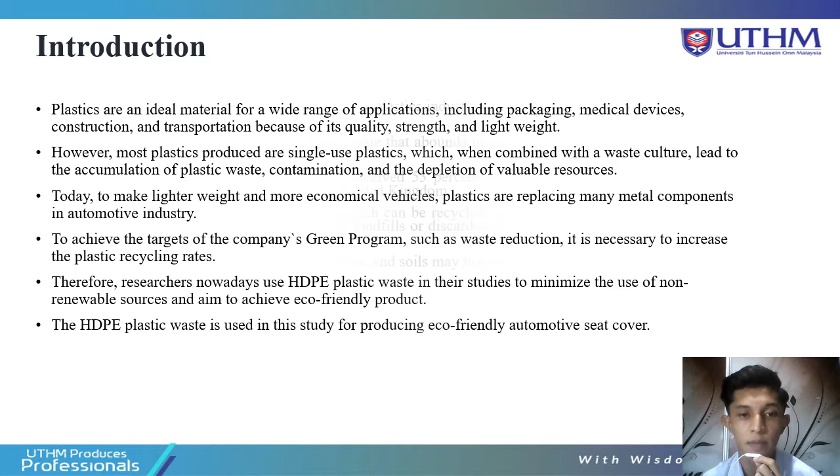Problem statement. According to the study, the main challenge for the plastics industry is determining the best way to reduce and reuse plastic waste rather than recycling it.

Plastic used as packaging is a popular plastic waste that abounds in our landfills, and Malaysia has become a global garbage dump. In the first 7 months of 2018, Malaysia received 53% of the 7.5 million tons of plastic waste imported by the United States, Japan, and United Kingdom.

Just 9% of this plastic waste is pure plastic which can be recycled, while the remaining 12% is incinerated and the remaining 79% is disposed of in landfills or discarded in the natural world, according to Ahmad, Abdullah, Chelliapan and Ahmad 2019. Animals may die because of the plastic waste, and soils may become clogged.

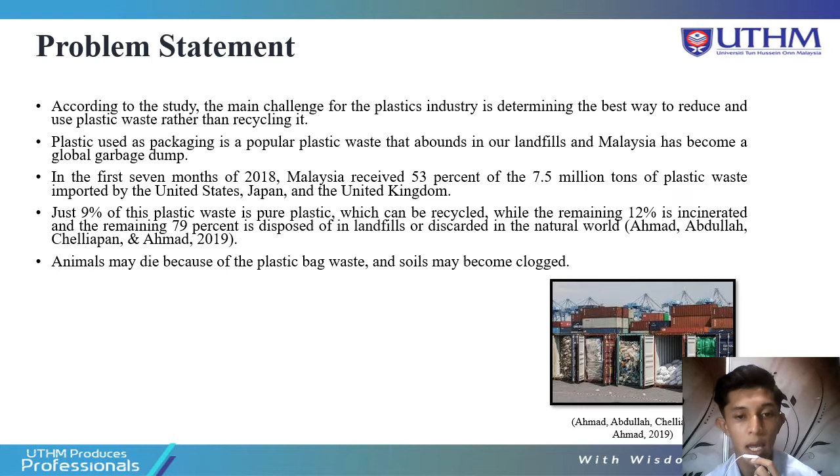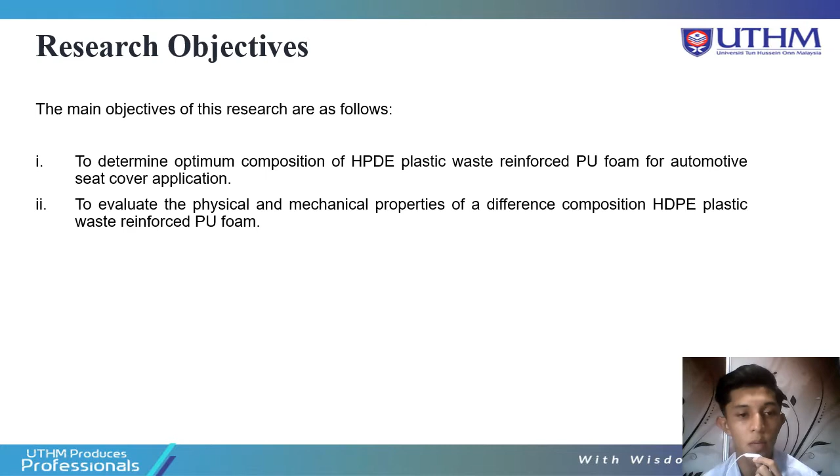Research objective. The main objectives of this research are as follows: first, to determine the optimum composition of HDPE plastic waste reinforced foam for automotive seat cover application; second, to evaluate the physical and mechanical properties of different compositions of HDPE plastic waste reinforced foam.

Research scope is divided into three parts. First, part A: to find out the different composition of HDPE plastic waste reinforced foam. The table shows four different types of samples: A, B, C, D, where foam and hardener have the same ratio of 1:1, and the HDPE plastic waste has four different ratios: 0.2, 0.4, 0.6, and 0.8.

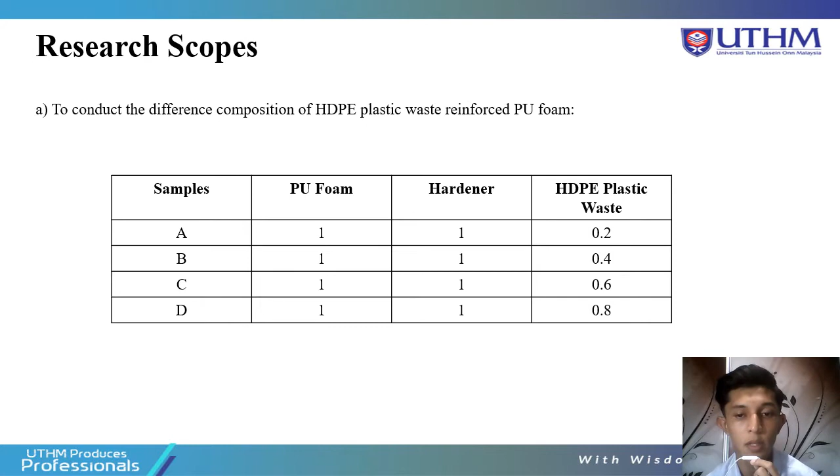Part B: to evaluate the physical properties test of different compositions of HDPE plastic waste reinforced foam. The physical properties tests include density test, porosity test, and SEM microstructure test.

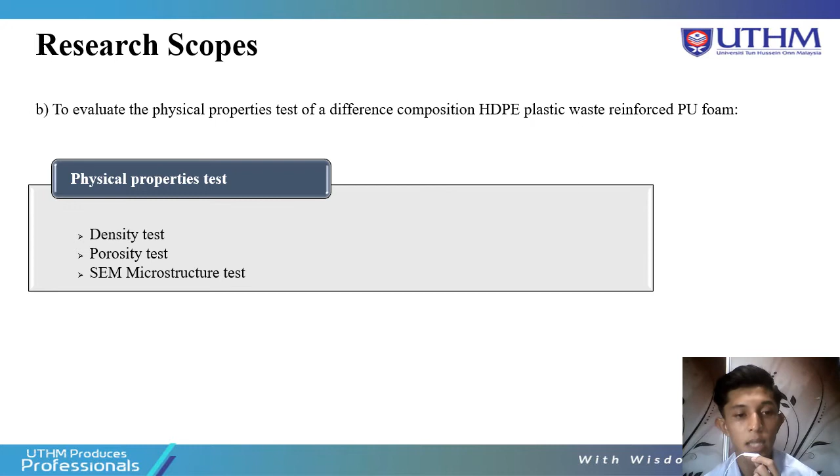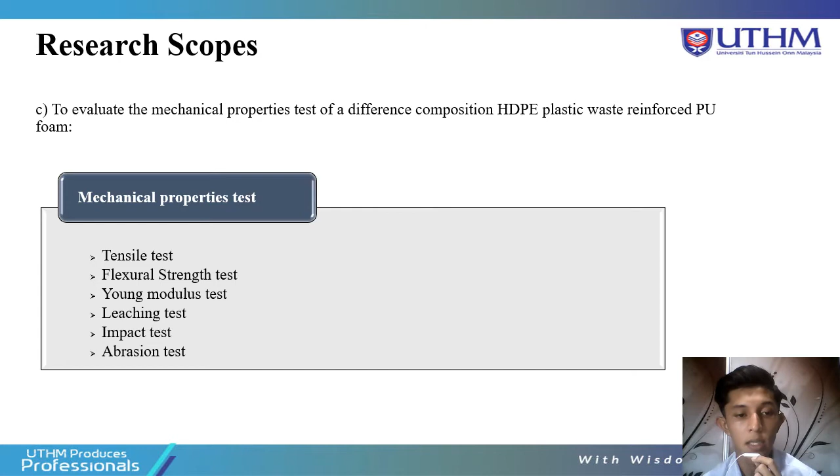Lastly, to evaluate the mechanical properties test of different compositions of HDPE plastic waste reinforced foam. The mechanical properties tests are tensile test, flexural strength test, young modulus test, leaching test, impact test, and abrasion test.

Chapter 2: literature review. Plastic is one of the materials known as polymer, a class of natural or synthetic materials made of molecules called monomers, with the capability to react with another molecule of the same type or another type under appropriate conditions to form the polymer chain, according to Britannica 2020, May 22.

The aim of plastic recycling is to minimize high levels of plastic waste by reducing the need for new materials to make new plastic items, according to Leblanc, R. 2020, November 15.

According to a 2018 report, several Asian countries have had restrictions on plastic bags and styrofoam items in place since 2002 to limit the use of plastic bags, including Bangladesh, Bhutan, China, India, Malaysia, Indonesia, Myanmar, Pakistan, Philippines, Sri Lanka, and Vietnam, according to UNEP 2018.

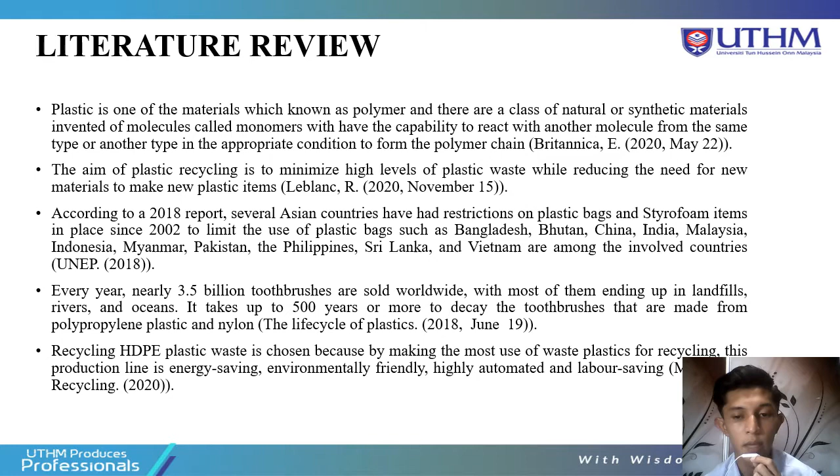Recycling HDPE plastic waste is chosen because by making the most use of waste plastic for recycling, this production line is energy saving, environmentally friendly, highly automated, and labor saving, according to Mechanical Recycling 2020.

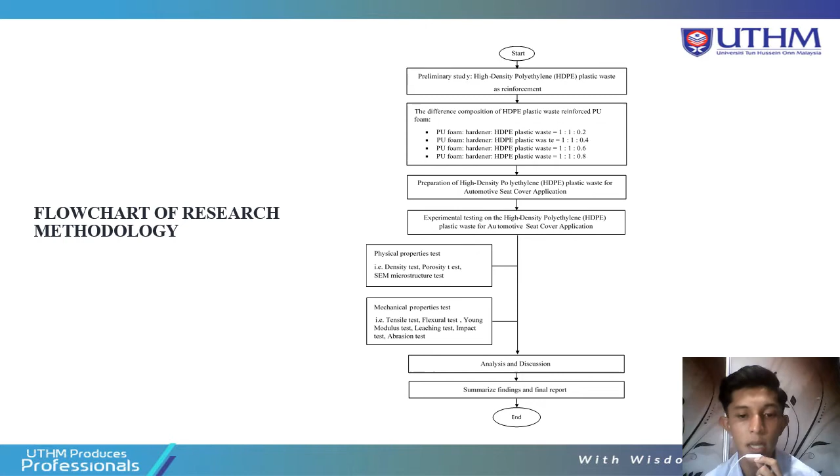First, physical property tests: density test, porosity test, and SEM microstructure test. Second, mechanical properties tests: tensile test, flexural resistance test, modulus test, leaching test, impact test, and abrasion test. The next step is analysis and discussion, and the last is summarizing findings and the final report.

This is raw material for this research. High density polyethylene (HDPE) plastic waste, foam, and hardener are the raw materials used to produce automotive seat cover.

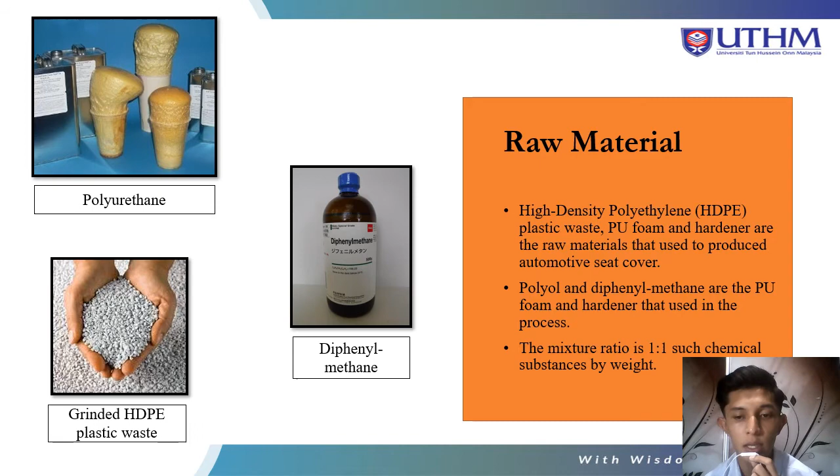Polyol and diphenyl methane are the foam and hardener used in the process. The mixture ratio is 1:1 by weight of chemical substance.

Preparation of grinding process: first, clean the HDPE plastic waste. Second, the HDPE plastic waste is cut into small pieces, and finally it is grinded to get the smallest size. Next, the grinded HDPE plastic waste will be weighed on a digital weighing scale and divided into four samples: 20 gram, 40 gram, 60 gram, and 80 gram.

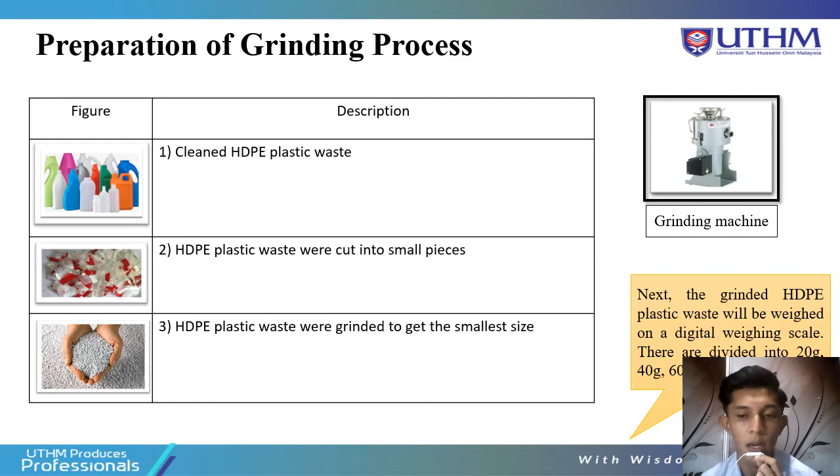Preparation of automotive seat cover application. The table shows the polyurethane, diphenylmethane, and HDPE plastic waste ratios. It will be manufactured by mixing HDPE plastic waste with a polyurethane solution made from composite polyurethane samples that include both isocyanate and polyol forms.

By mixing polyol, the procedure will be achieved at a 1:1 ratio at 24 degrees Celsius room temperature. Initially, various ratios of HDPE plastic waste will be combined into polyurethane foams. This procedure is required to ensure the material produced is a high quality product, and that the HDPE plastic waste used will make good insulating foam.

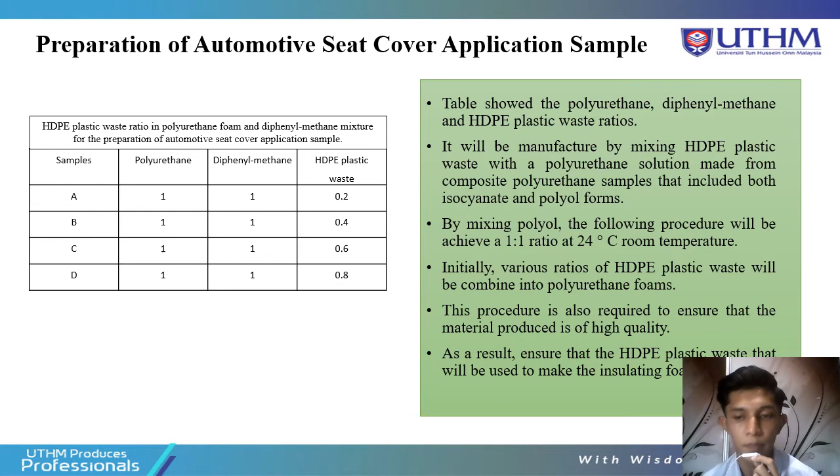Fabrication process: fabrication is the process of combining typically standardized parts with one or more different procedures to create products. In this experiment, the polyurethane foam and polyurethane hardener will be measured using a 50 ml syringe containing a chemical solution of a 1:1 ratio.

The procedure for preparing the chemical polyurethane solution is to blend the chemical solution with HDPE plastic waste. Plastic food containers and wooden stirring rods will be used as a manual mixing machine to mix the solution. The mixing of polyurethane solution with polyurethane hardener and plastic waste is the first step in the process.

Initially, the polyurethane solution will be mixed completely with HDPE plastic waste in the plastic food container before being mixed with the polyurethane. The polyurethane hardener will then be mixed completely into the polyurethane foam blend until it expands into the polyurethane and HDPE plastic waste blend foam.

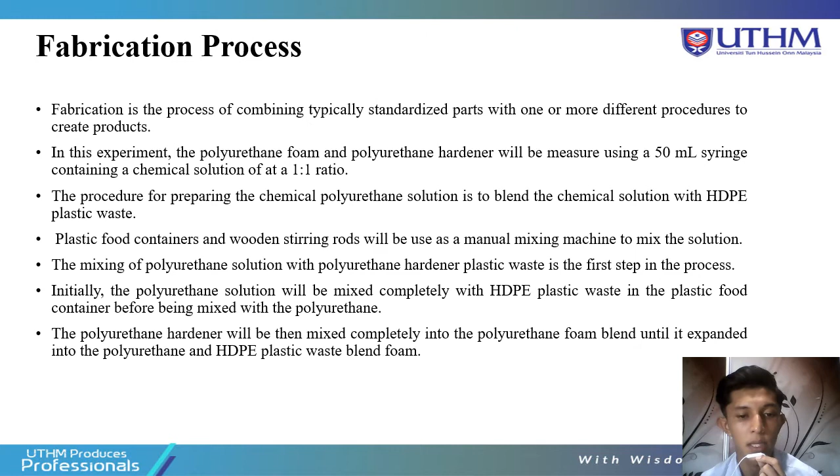This is my research testing for this product: mechanical and physical tests on automotive seat cover application. This is physical testing, and the first is the density test.

Placing test specimens in water and adding isopropanol until the plastic sample achieves neutral buoyancy in solution is how the density test of HDPE plastic waste is determined.

Second is the porosity test. From the definition of porosity, all approaches lead to the determination of two of three volumes: the sample's total or bulk volume, its pore volume, or the volume of its solid matrix.

And the last is the SEM microstructure test. SEM, that is scanning electron microscopy, is a test method that uses an electron beam to scan a sample and provide a magnified image for analysis.

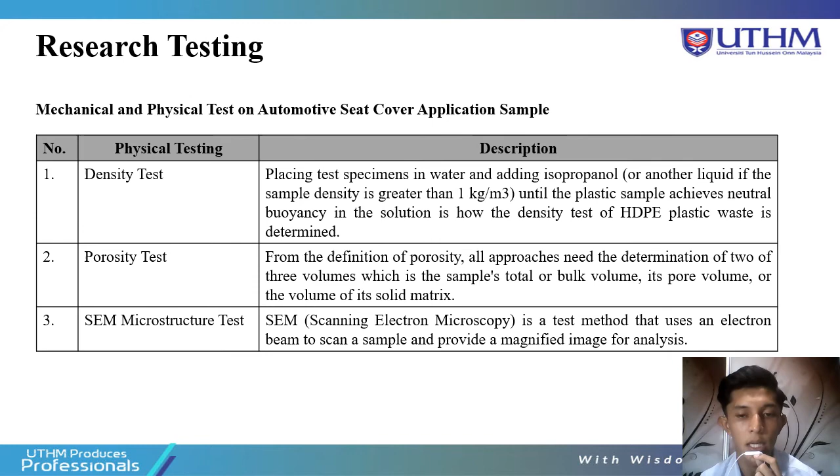Okay, for mechanical testing, the first is the tensile strength test. Tensile testing determines whether a material is durable and efficient when subjected to a stretching force, and these tests are carried out under regulated temperature and pressure settings to determine the material's maximal strength or load capacity.

Second is the flexural strength test. Flexural test, also known as bending strength, is defined as the maximum stress in a material, and the main objective of the bending test is to measure ductility, bend power, fracture power, and specimen fracture resistance.

And the third is the Young's modulus test: the ratio of the stress applied to the material along the longitudinal axis of the specimen tested to the deformation or strain observed along the same axis is known as Young's modulus.

Fourth is the leaching test. The dissolving of a range of HDPE plastic waste and compounds into the water is referred to as leaching test, and it can be difficult to tell the difference between corrosion and leaching in some cases.

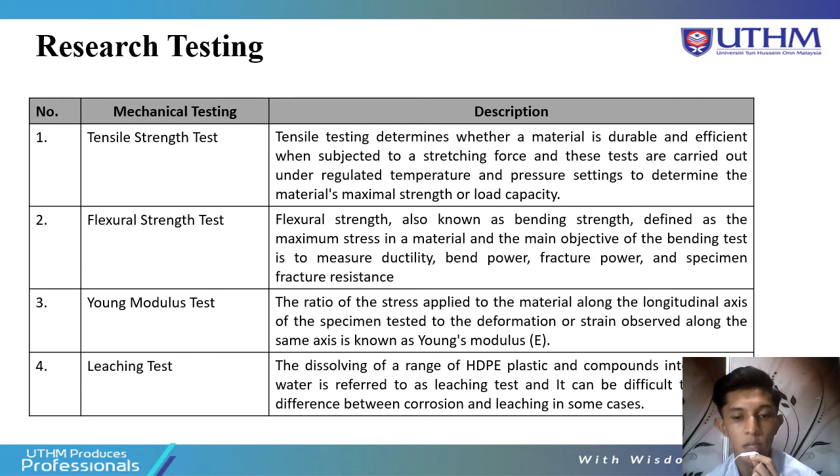And the fifth is the impact test. Impact tests are performed to determine the toughness of a material, while a material's strength is a factor in its ability to absorb energy during plastic deformation.

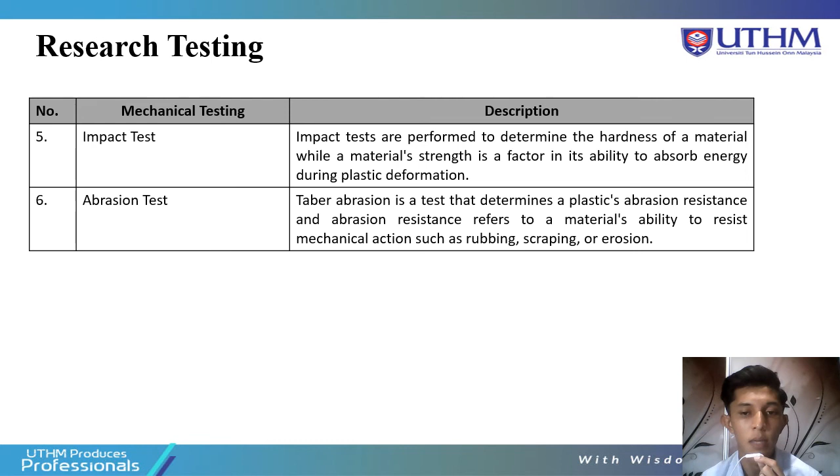And the last is the abrasion test. Taber abrasion is a test that determines a plastic's abrasion resistance, and abrasion resistance refers to a material's ability to resist mechanical action such as rubbing, scraping, and erosion.

The last part is the conclusion. The purpose of this analysis has been studied and will be reached after the physical and mechanical testing are done, based on the different ratio of HDPE plastic waste reinforced. The mechanical and physical testing will be understood and will be done successfully soon.

The advantages of using HDPE plastic waste can reduce pollution and can save the ecosystem with reduced negative disturbance and damage to the natural environment in the world. With this usage, HDPE plastic waste will minimize cost and energy to produce the product. When recycled materials are used instead of new materials, less energy is used in the production process.

The product will be friendly to the ecosystem.

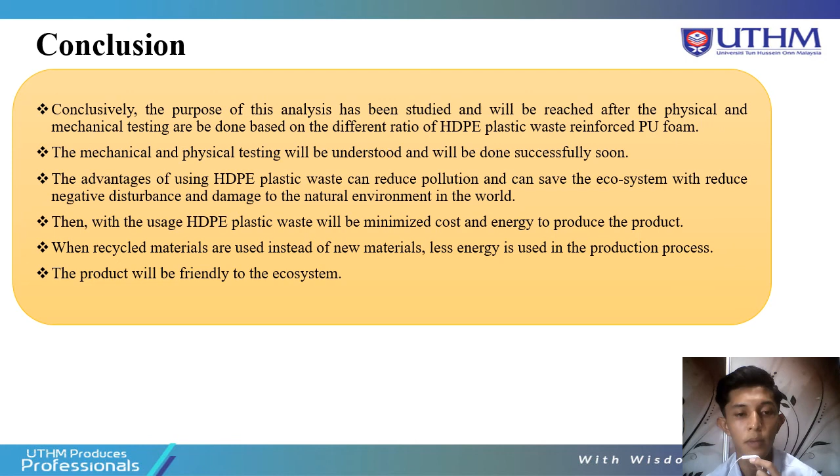Okay, this is my references for the slide presentation.